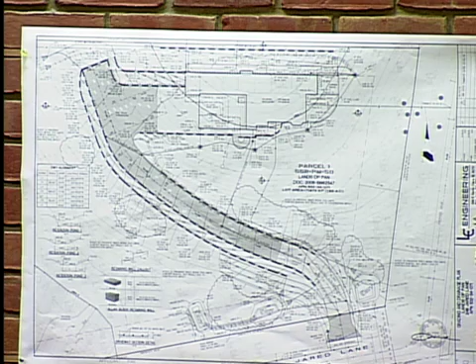Mr. Mullen, would you give us a report? Thank you, Chair Kane. Before you tonight is a continued request to construct a new single-family residence and remove large protected trees on vacant property at 248 Jared Lane. As Chair Kane stated, the Planning Commission first considered the application on April 11th of this year and continued the item to allow the applicant time to provide more information on grading as it relates to the driveway, continue outreach to their neighbors, consider building within the LRDA or reduce the encroachments outside of the LRDA, and consider reducing the massing. The applicant has provided a response based on the direction received from the Commission in the form of changes or revisions to the plans as well as new information.

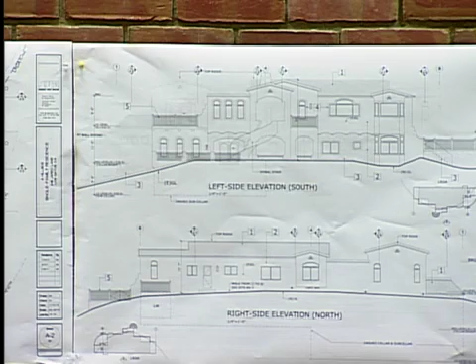Regarding grading, the applicant revised the driveway design with changes to the cut and fill quantities and locations. The net result is a reduction in the driveway slope from 19.53% to 15%, which also eliminates one of the previously requested exceptions. The revised driveway also reduces the maximum height of the retaining walls.

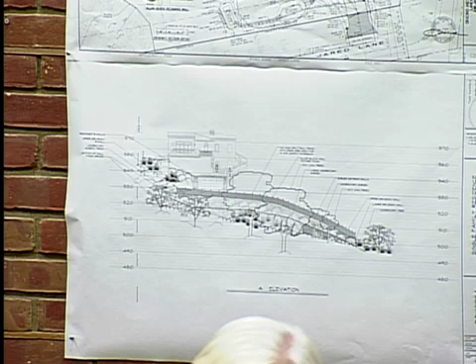Previously, they were at a maximum height of 14.2 feet. They've reduced by 5.9 feet down to 8.3 feet at their maximum height, with the maximum standard in the Hillside Development Standards and Guidelines being 5 feet. So there's still an exception requested there, but the extent of the exception has been reduced.

The applicant has also provided some new information that compares the previously approved 2011 application to the current proposal. The comparisons are relative to the extent outside the LRDA the two projects went, and a massing comparison. As you can see in front of you, the applicant has prepared a scale model to aid in the review of the application. The model helps demonstrate the massing of the building and the screening provided by the existing trees.

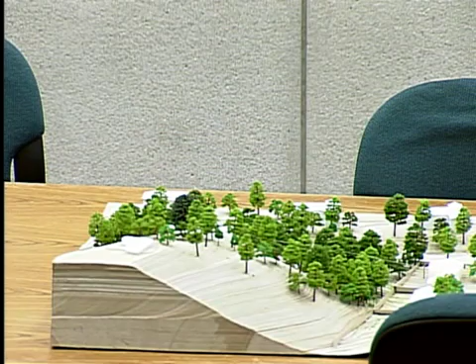Also, lastly, attachment 16 to your staff report shows continued outreach to the neighbors for the project. The project continues to include several requests for exceptions, although one has been eliminated from the previous iteration. The exceptions to the Hillside Development Standards and Guidelines include development outside the LRDA, retaining walls with heights exceeding 5 feet and lengths exceeding 50 feet, and grading exceeding maximum allowable cut and fill depths. This is mostly related to the driveway and the access to the site.

Based on the analysis provided in the staff report, staff recommends approval of the architectural and site application subject to the conditions contained in your staff report. This concludes staff's presentation. We are happy to answer any questions.

Thank you, Mr. Mullen. Commissioners, questions for staff? I have a foundation question.

Sure. Your report indicates a large number of protected trees are going to fall by the wayside. Give me a primer on what is a protected tree, why do we call it a protected tree if we're going to cut it down? A protected tree under an architecture and site application or a planning application is any tree with a breast diameter height of 4 inches or more.

So that is a pretty small tree. The definition of protected tree changes based on the application for a building permit. It can be species specific and size specific. In this case, there's 57 protected trees proposed for removal, 3 in addition to that are large protected trees. And the applicant, through working with staff and understanding the evolution of this process of the project, has indicated that they're going to do their best to minimize the removal of trees. So there may be fewer, but we're taking a conservative approach.

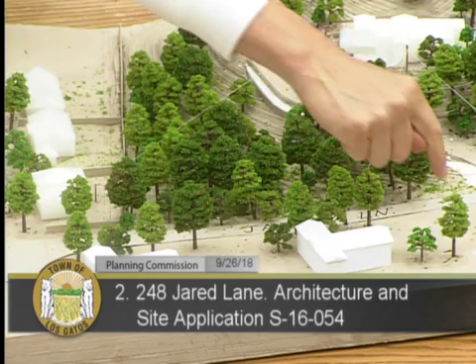Steve never goes to this side. I go to this side by myself with their director, and we walk from here all the way to there. The only spot here, it can see the top of the story pole right now, only the top part. Even for my guests, they cannot see the stair at all from this side. We went down and up, tried to visit, make sure everything's okay. The only spot is here.

From that near between distance, these two houses, but the adjacent ridge, the south ridge, where you cross the street, no, not just across, on the hill that's behind it. No, because this is the highest spot they have, it cannot be higher. Okay, maybe I was mistaken. I looked from the story pole, so the only thing we can see is the story pole on top a little bit, maybe about 5 to 6 feet of the story pole.

So my question about the staircase: the staircase is specifically called out in the residential design guidelines as a large visible staircase. How would you explain this so that it is in compliance with the hillside design guidelines that say avoid overhanging decks, large staircases, and patios formed by retaining walls that make buildings appear more massive?

Thank you for citing that section, because I don't remember every little detail about this. The only thing I can explain is this stairway is only 3 feet wide. It's curved, only 3 feet, because of the situation of the house. Only allowed me 3 feet. And it was not exposed to the eye, it's enclosed by the wall, which is a stucco wall, and it's blended into the house.

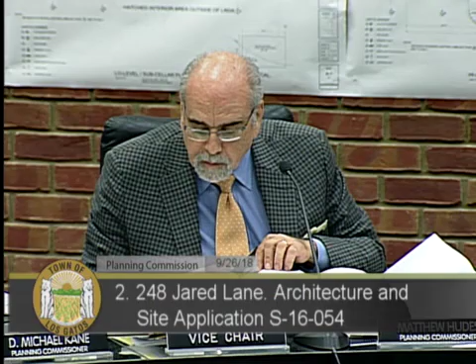Correct. And what is the width of that? It's more than 3 feet, right? That's why it's got to be... I don't, probably plus one, that I would have said maximum 5 feet. The wall, the stairway there is 3 feet, 42 inches, 3.5, 3. I don't think it's a large one. The width of that curve, though, is considerably larger than 3 feet, that has to be at least... oh, you mean 10 or 12 feet?

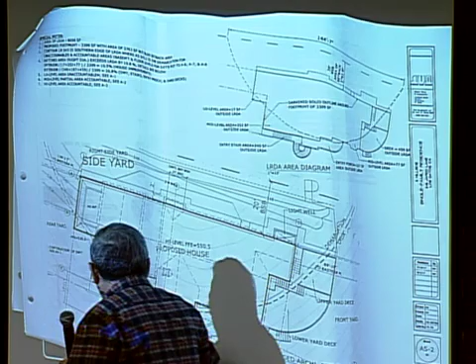Yeah, this whole thing, of course, is bent here, from here to here, probably 12 feet, you're right. So, relative to the front of the house, it looks to me like a large staircase. Looking from the top, we know this is stair going down, going up. When you look in the 3D model, it's floating and spiraled up. It's hard to visualize that's the stairway, but that's the best I can deliver for an outdoor stairway, without any cover.

Other questions for the speaker? Commissioner Janoff: yeah, a couple of questions, one following Commissioner Hudes' questions about the stairway. As far as I can ascertain from the design, the reason why you have such a massive front staircase is because you've created the main entrance to the home on the second story rather than conventionally on the first story.

Or what you're calling the mid-level cellar plan, still cellar, since the mid-level cellar plan on the south elevation is actually not a cellar, but it's open living space, you're right. Had you considered at any time switching the family room and switching the configuration of the home so that your living areas, your entertaining areas are on the first story, such that you can eliminate that large front-facing, possibly objectionable staircase?

Internal rearrangement, I don't have an answer now, but I think the main focus you're concerned about is the bulkiness of the stairway compared with, looks like, 12 feet. Certainly we can readjust it later for the link between the first floor and the second floor, which is the mid-level and the top level. As far as switching the interior, it's not easy to discuss tonight.

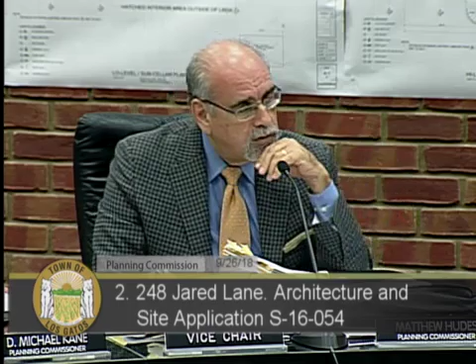Okay, so the retaining wall is terraced, and the height of that in total, what's the height of the two or three terraces? Only two, because our design... Two, okay, yeah, so only two. What's the height of the two? The total height, I think it's 8 feet.

If combined together, let me see whether I have that sheet there. Let me see. I need to put in my reading glasses. The sheet of C3, if you share with us to read that thing, it's hard to see here.

Okay, you can see the highest one, I would say 12 plus 20, which is almost in the middle section of the drawing, and also 12 plus 0. The rest is not that high, except this one's pretty tall. Let me see how tall it is. 520, 10 feet: 2, 4, 6, 8, 10. Okay, 2 feet: 2, 4, 6, 8.

So if you look at this one, 12 plus 20, with revision number... if you read that on the left-hand side, it's the scale of the height: 500, 510, 520, 530. So each scale, each line represents 2 feet. So if you look at the intersection of the third and the height of the black retaining wall, that's 8 feet. You can count from there.

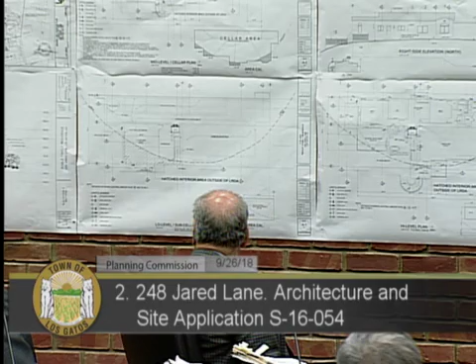So is that roughly 200 feet in length? Probably, I would say probably in the neighborhood of... how many feet? 20 feet. I don't remember exactly, but we reduced quite a bit, at least 5 feet. Oh, so the overall isn't 8 feet all the way, it varies: 0, 2, 3, 4, 5, 6, up to 8.

Right, so I'm making another point, not so much about the height, but the length of this. And so the length of the driveway? The length of the retaining wall. Let me see, do I have an idea? Length, not 200 feet - I would say maybe 100 feet or less.

Yeah, it's hard for me to read it because there's no scale. Well, my point is - yes - I want to get to the design guidelines.

So on page 18, it says hard edges left by cut and fill operations shall be given a rounded appearance that closely resembles the natural contours of the land. And on page 19, it says manufactured slopes adjacent to driveways and roadways shall be modulated by berming, regrading, and landscaping to create visually interesting and natural appearing streetscapes.

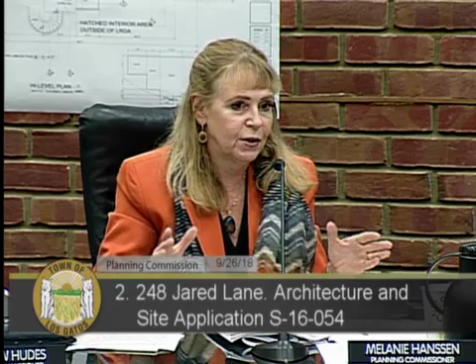Thank you. Commissioner O'Donnell.

I'm very sympathetic to this property and therefore the applicant. Something should be built there. The difficulty, I guess, is I agree with the statement that perhaps were the garage not under the house, some of the problems would be solved.

Now, if I were the applicant, I'd say, well, wait a minute, the last time somebody considered this, they didn't want it in front of the house because that was in the LRDA. So we did that in response, and I understand that. But we have a lot of moving parts on this.

And I don't get the feeling that perhaps our guidelines were understood by the applicant. And therefore, our questioning tonight, in many respects, was a waste of time, because you ask somebody a question which is a narrow question coming from what we know to be our guidelines, and you get an answer which is a broad question saying, this is the best we could do. That won't cut it. We don't have the right to say, in this case, we're going to ignore the guidelines because you tell us that's the best you can do.

So I'm suggesting that if, in fact, this is not approved this evening, a new view of this be looked at. Our people ought to understand better what we do here. They ought to understand better what our regulations are. These are not impossible regulations. But tonight, I was concerned that the parties did not understand what we do and did not understand our guidelines.